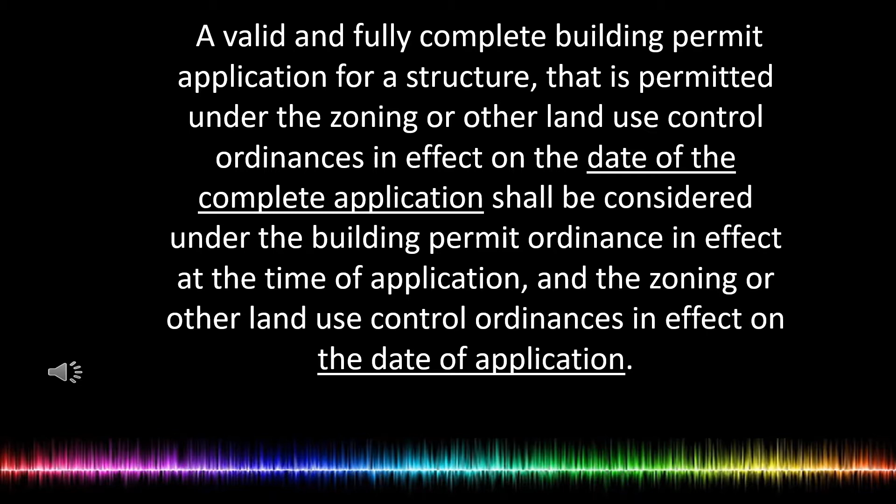It's the date of submission that sets what codes you're on. It's important to note that the application needs to be complete. Part of what is complete is defined by state law, and each city can amend that to make more requirements. In other words, you can't turn in something on a paper napkin and expect it to be vested under the 2015 codes.

There is no statutory requirement for the State Building Code Council to adopt each edition of the codes. They do so by choice to keep abreast of the latest building technologies. The State Building Code Council also amends the existing codes.

As an example, the 2015 IRC was retroactively amended to allow for cross-laminated timber because it was considered the best, most modern technology, and we should avail that to the designers and the builders.

The reason for the concrete stairways is one of the disadvantages of cross-laminated timbers: it's too stiff. So in a major earthquake, people on the upper floors would be beat to death. So they left the building fairly ductile, and lateral support is provided by the concrete stairways because, believe it or not, the concrete is capable of moving a lot more than the CLT is.

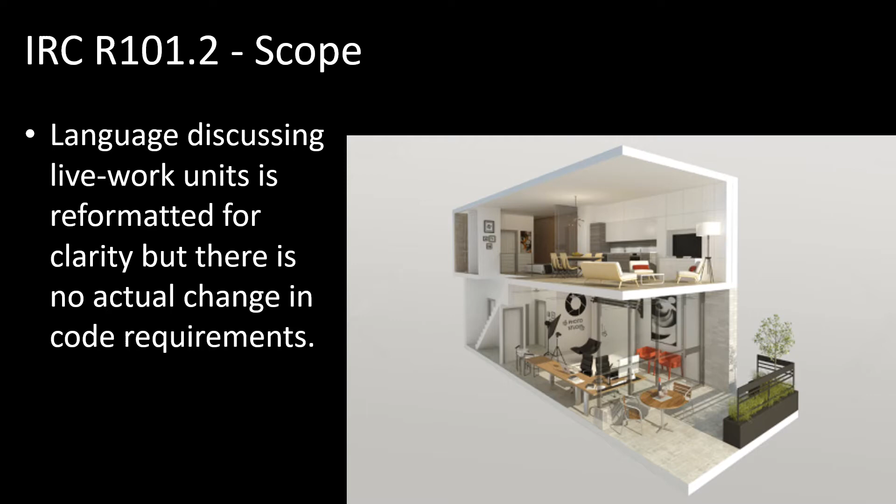The allowances on this slide come from an original interpretation requested by the city of Spokane. In the SBCC deliberations on the matter, it was brought out that short-term rentals were actually hotels and motels and governed under the building code rather than the IRC, unless they were owner-occupied. Hotels and motels require fire sprinklers, therefore Airbnb and similar vacation rentals require fire sprinklers.

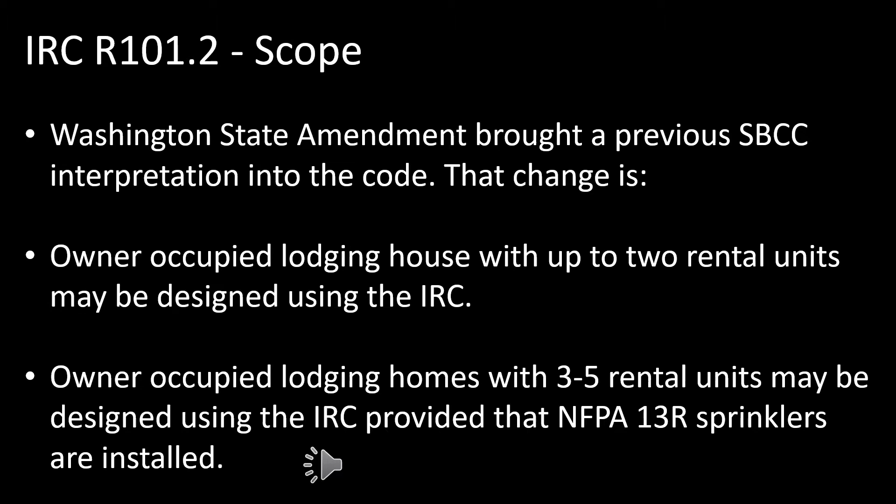Several jurisdictions are going after Airbnb and similar businesses for not providing fire sprinklers in their short-term rentals. The reason is that short-term rentals take those dwellings off of the long-term rental market, therefore driving up the cost of rental housing. This slide is fairly self-explanatory, although may be interpreted differently by various jurisdictions.

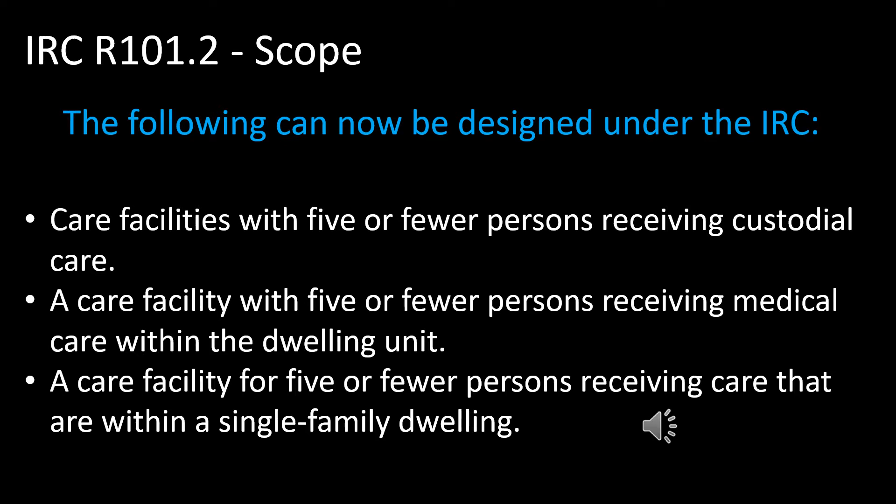The SBCC discussions on the issue, it was agreed that such buildings should fall under the scope of projects that building designers could design. Care facilities, as shown in the previous slide, must be provided with NFPA 13D, that's single-family sprinklers.

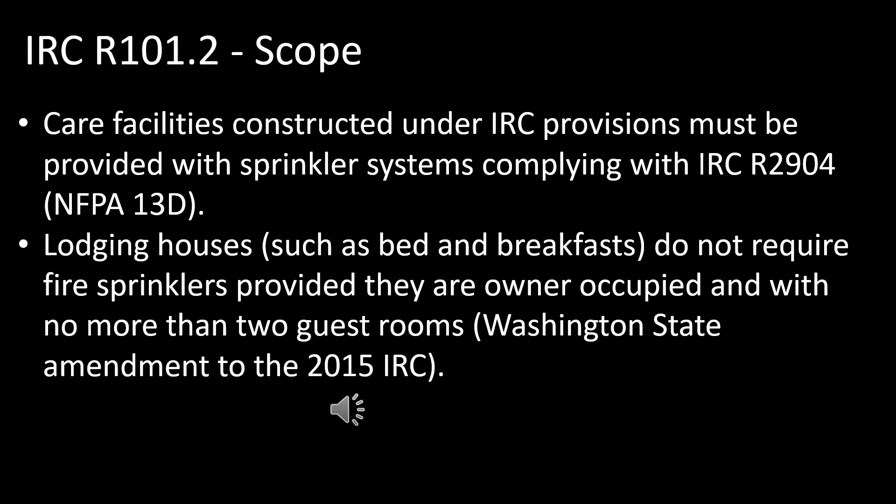Lodging houses, as long as they're owner-occupied and meet the limitations of previous slides, do not have to be fire sprinklered. This table provides an easy cross-reference between the 2015 and 2018 IBC code sections regarding occupancies previously listed. Please keep in mind the Washington State amendments discussed on previous slides.

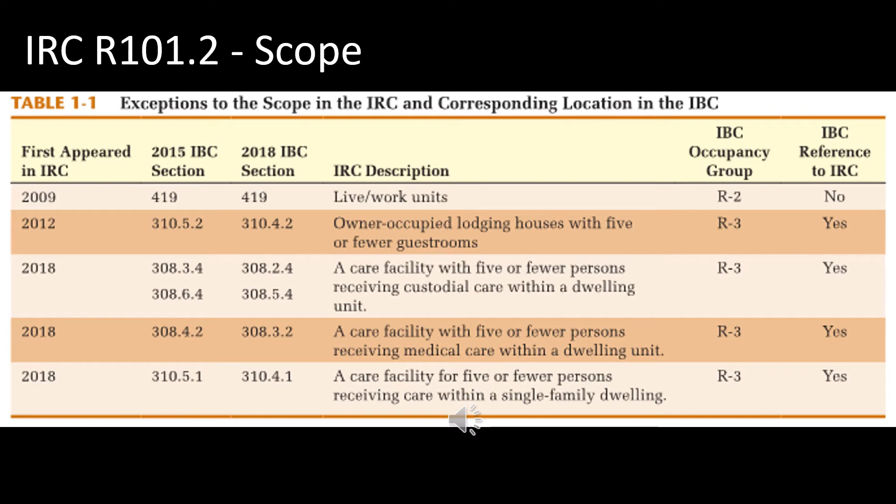Alternate materials or methods of construction have always been allowed by the codes. While the building official is not required to approve alternates, they must provide a reason for denial when requested.

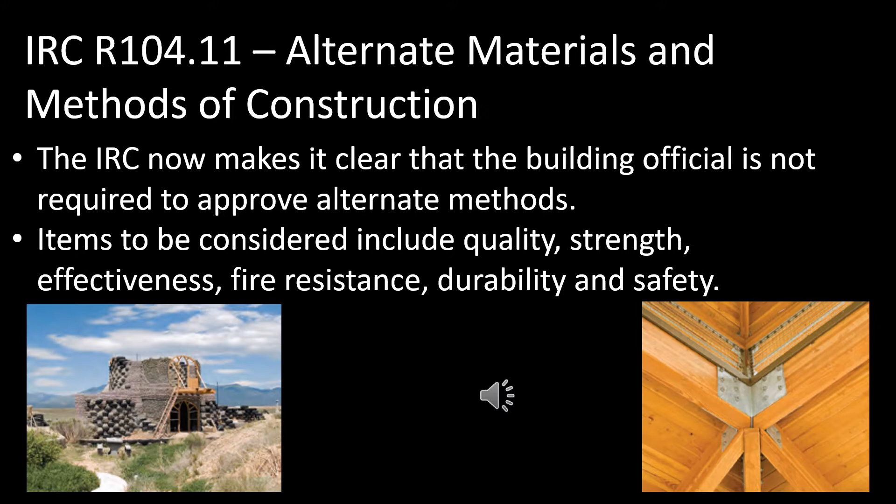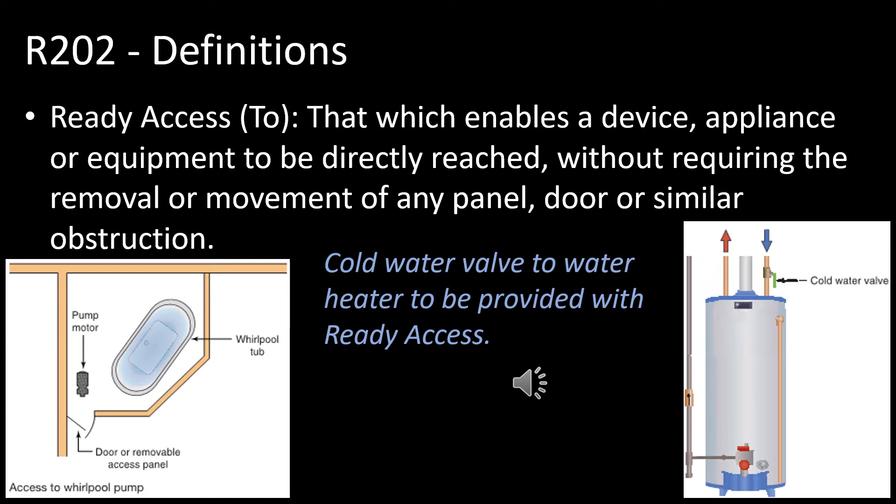Washington State has amended the IRC to include the definition of balanced whole house ventilation. Typically, the details for balanced whole house ventilation would be provided by the mechanical contractor. However, with more and more jurisdictions issuing combination permits, it may be required that documentation for such systems be provided at the same time as the building permit documents.

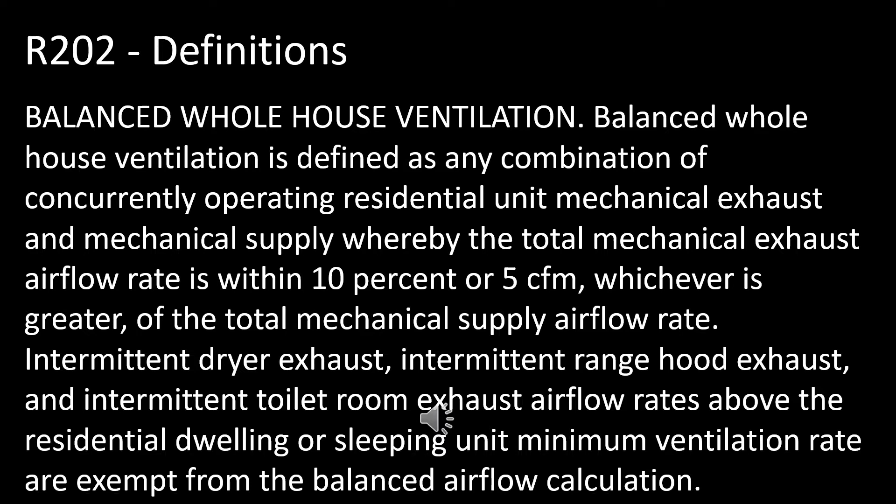Detailed requirements for those systems can be found in State Amendment M1505.4.1.4. Typically, combustion air for items such as fireplaces would need to be calculated in the balanced whole house ventilation system, but intermittent items such as bathroom exhaust, laundry exhaust, and kitchen exhaust would not be included.

There has been a lot of confusion over the years as to how fire separation distance is calculated. Some jurisdictions use the face of the foundation wall, while others use the face of the exterior wall. Imagine using the foundation wall when you have a 2-foot cantilever extending closer to the property line. That just doesn't make sense.

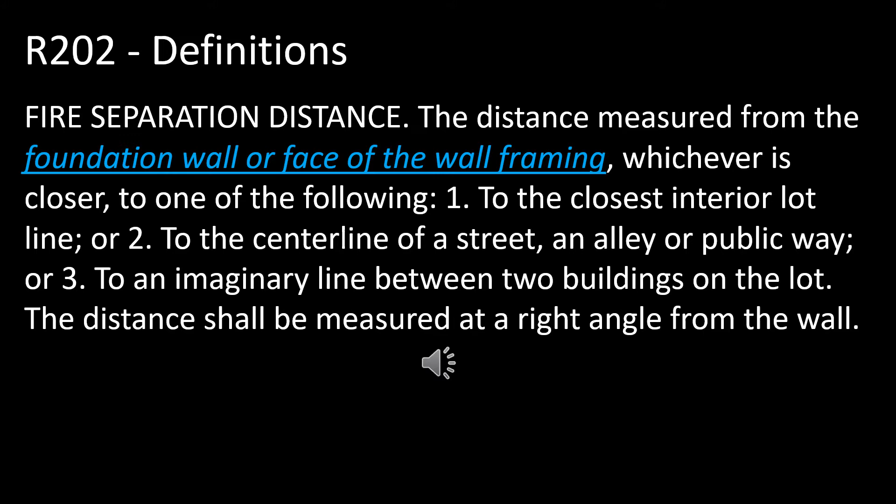The new definition clarifies this to include either, based on which one is closest to the property line or an assumed property line between two buildings.

Another new definition in the IRC is sleeping lofts. Such spaces were previously not recognized in the IRC. We'll talk about the detailed requirements for sleeping lofts a little bit later.

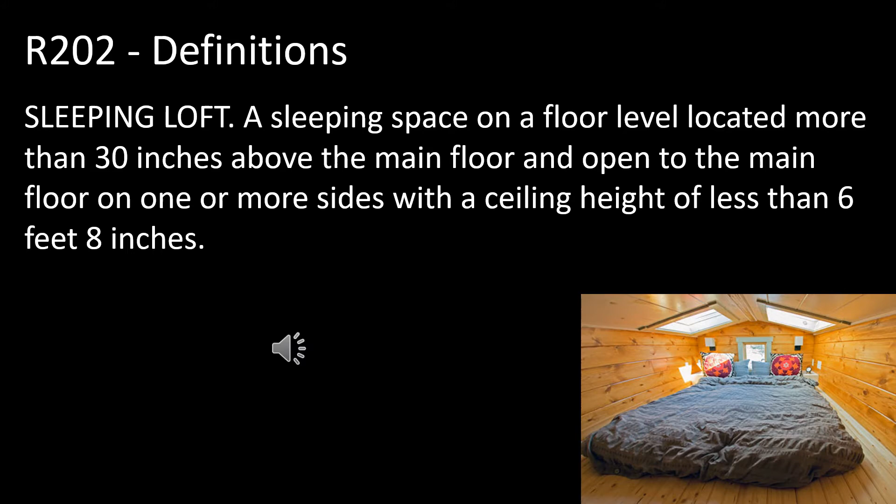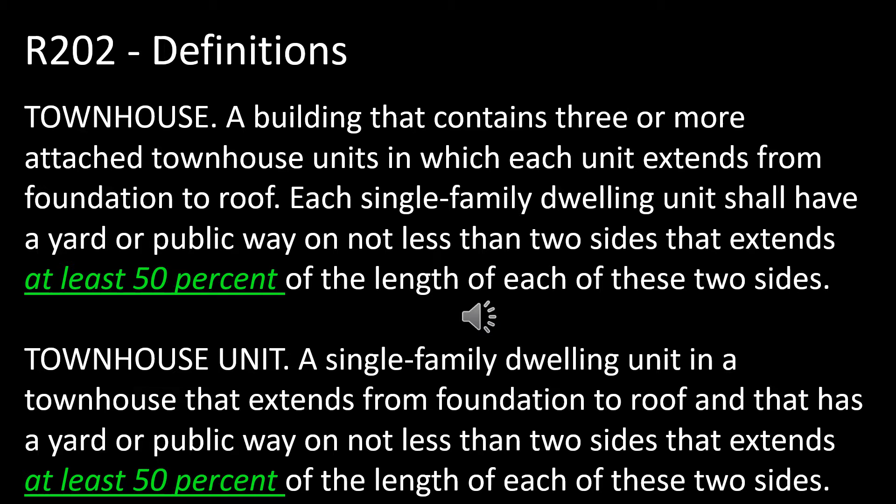Previously, a townhouse unit had to be completely open to yards or courts on 2 or more sides. This has now changed so that the 2 or more sides only need to be open for 50% of their length to open courts or yards.

Projections such as eaves, decks, or balconies, which were within required fire separation distance, had to be fire resistance rated in accordance with ASTM E119 or UL 263, which are tested and listed assemblies. The code now allows non-rated assemblies as found in IBC section 721, or calculated fire resistance as shown in IBC 722.

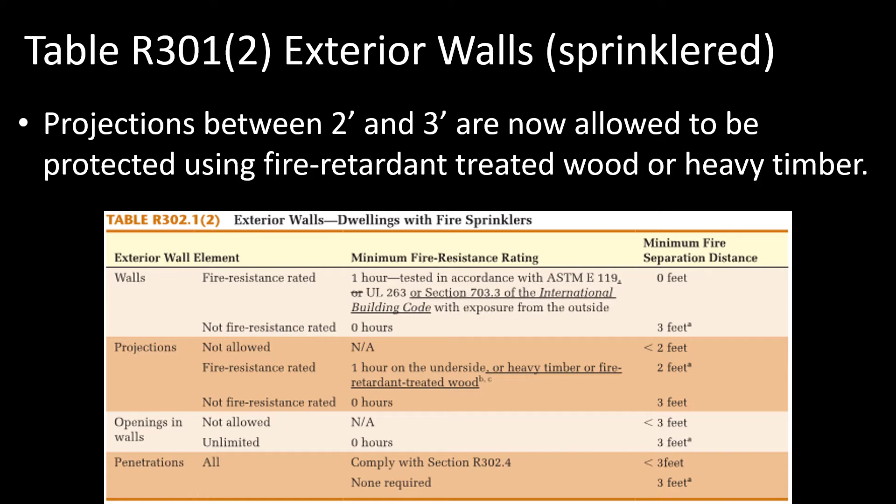The 2015 IRC did not allow 2 one-hour walls to separate townhouse units unless the building was provided with fire sprinklers. Washington State had amended the requirements so that fire sprinklers were not required when using 2 one-hour walls between townhouse units. Because several other states did not require fire sprinklers in townhouses, the Washington Association of Building Officials, WABO, proposed and was successful at removing the fire sprinkler requirement in the national code.

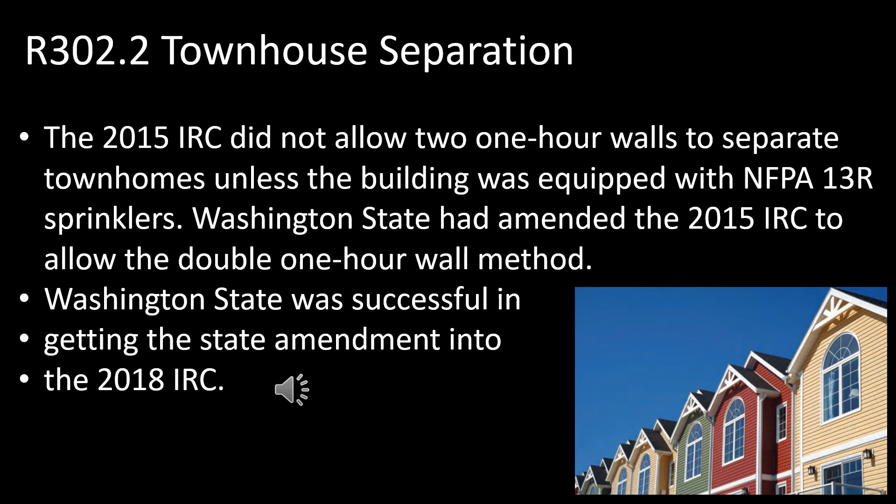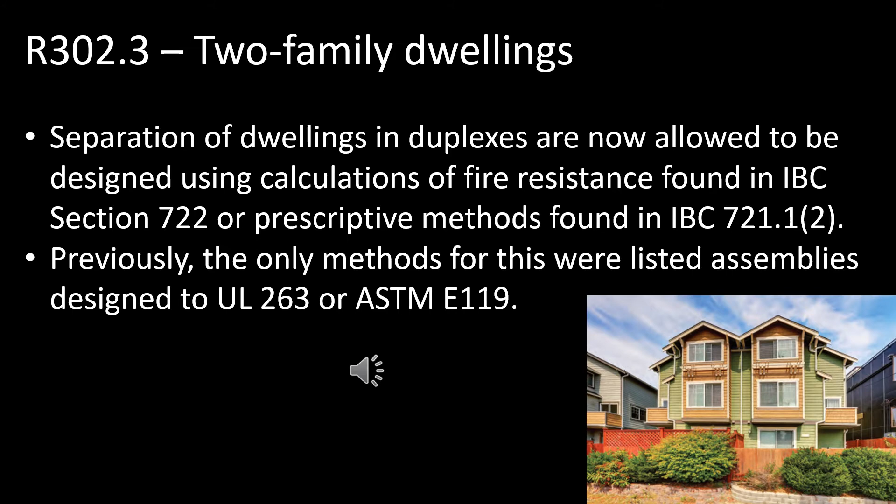In duplexes, the IRC now allows calculated or generic fire resistance for the 1 hour wall separating those units. Those, again, are found in IBC sections 721 and 722. IBC section 703.3 guides us back to IBC section 721 and 722 for either calculated or generic fire resistance.

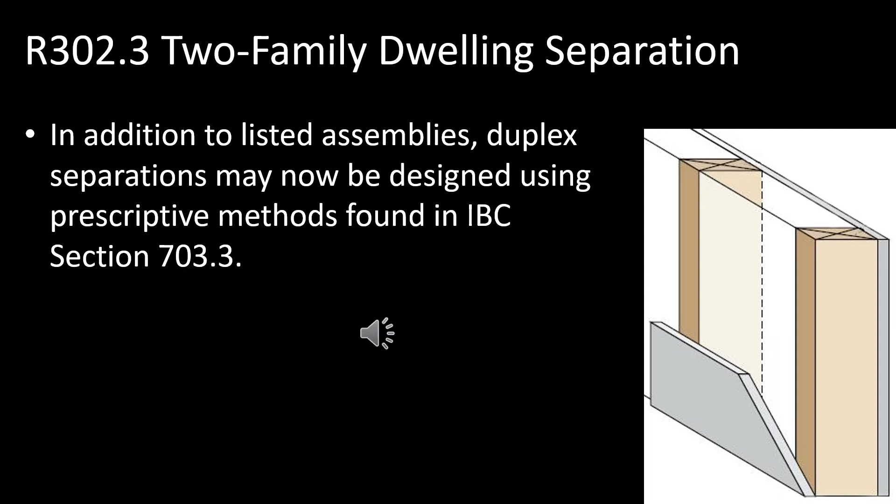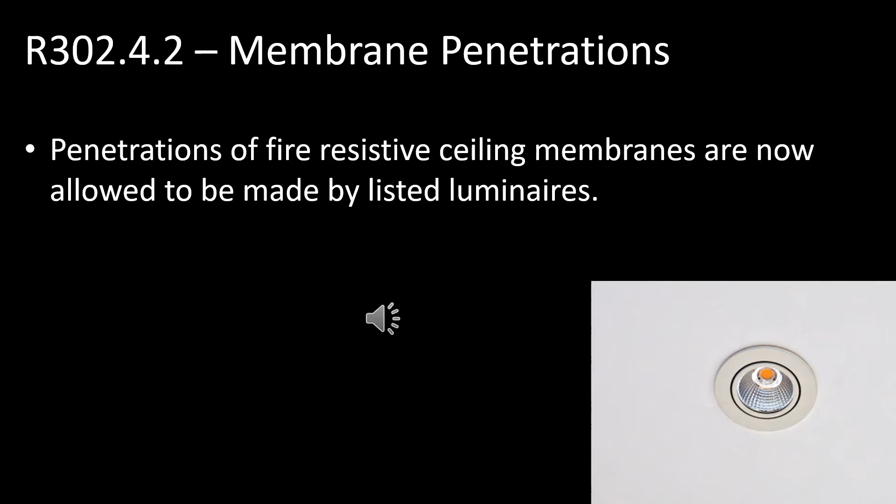I recommend that when you specify can lights in 1 hour rated ceilings, you call out the requirement for 1 hour listed fixtures. Of course, this doesn't apply to townhomes, as a townhome has to be 1 unit from the ground to the sky, so there's nothing above it.

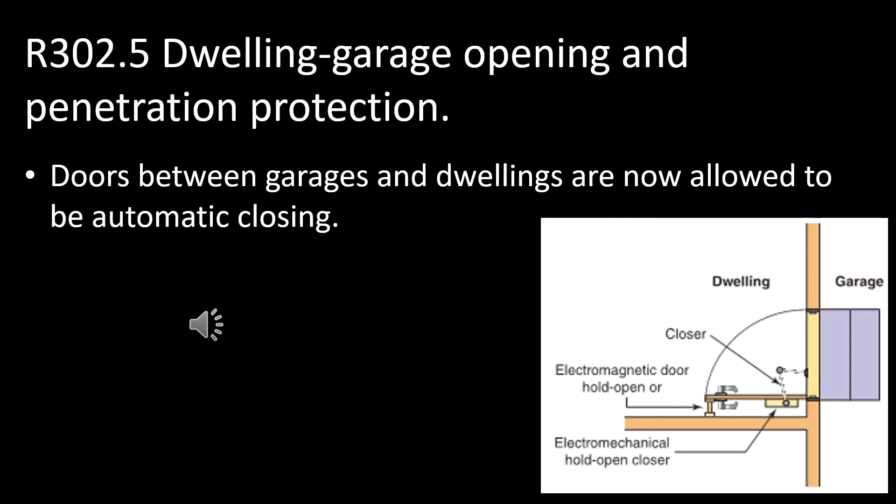This change in language is simply clarification of what the code had always intended, and probably will rarely, if ever, affect the design of your buildings.

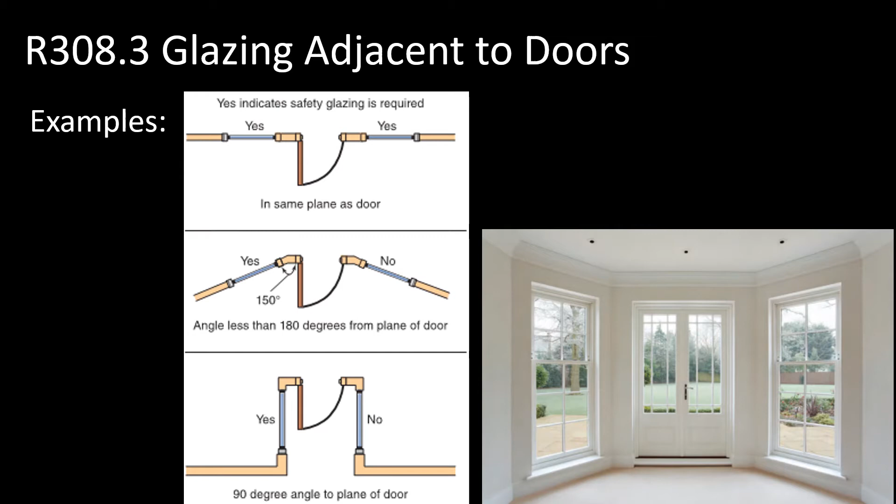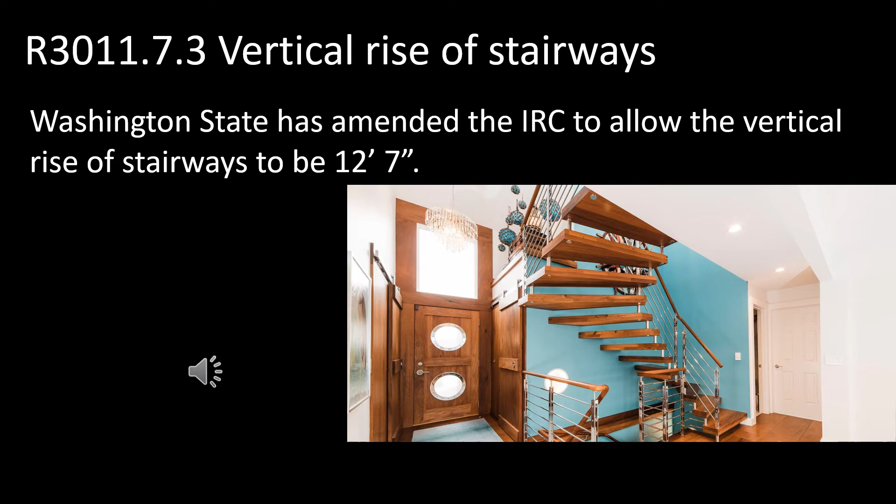The change in vertical rise in the IRC is intended to give more flexibility in your design to meet real-world conditions. This change is fairly straightforward. They've simply added electrical appliances to the items that would invoke protection of the floor or ceiling above in crawl spaces or unfinished basements. Of course, no protection is required in a sprinklered building.

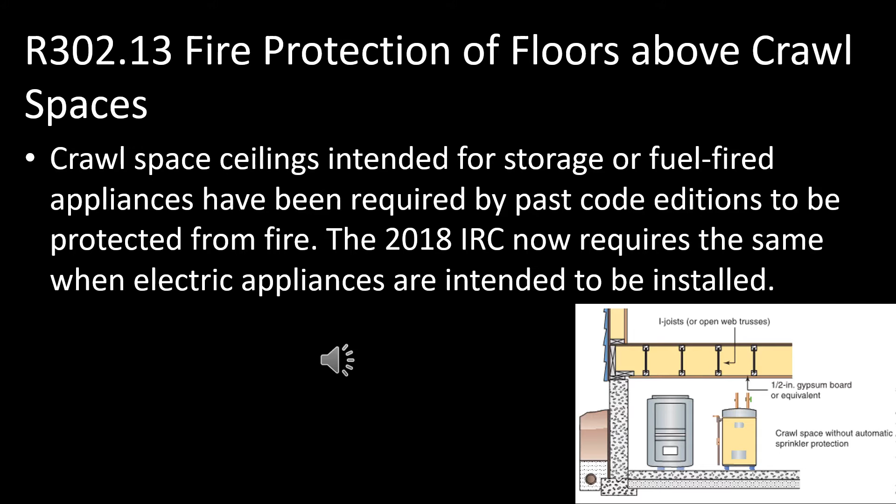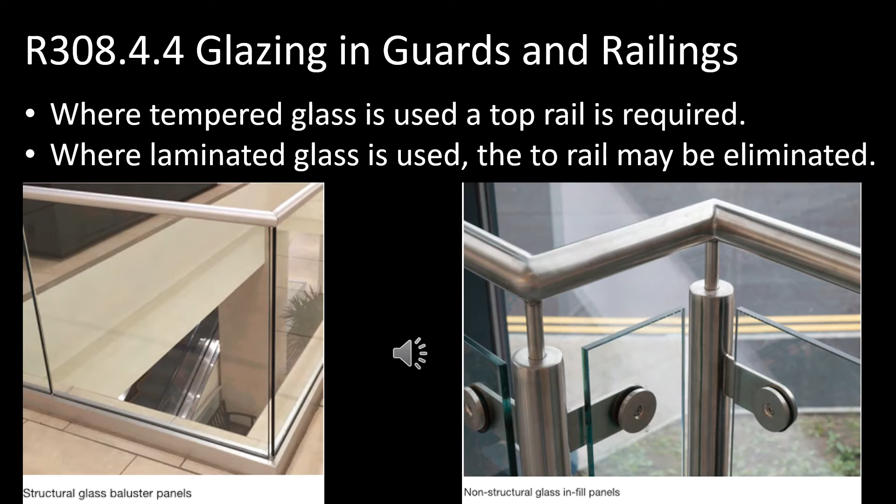Because tempered glass breaks into small pieces and falls when broken, it provides no actual protection from fall. Laminated glass, however, does provide protection because it'll generally stay in place. Therefore, when tempered glass is used, a top rail is required on a guard. When laminated glass is used, a top rail is not required.

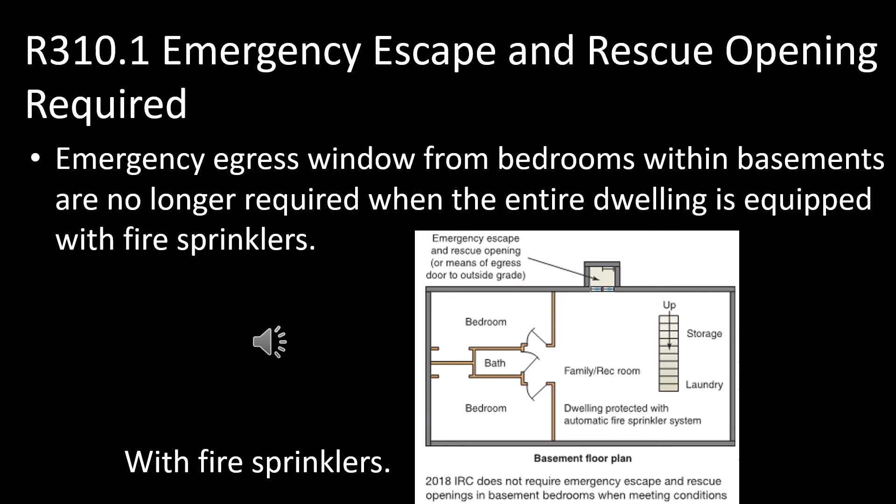The IRC now recognizes that egress windows from basement bedrooms are no longer required when the entire dwelling is equipped with fire sprinklers. Remember, that's the entire dwelling. Although you still need two ways out of the basement in this scenario, one of which has to lead directly to the exterior of the building.

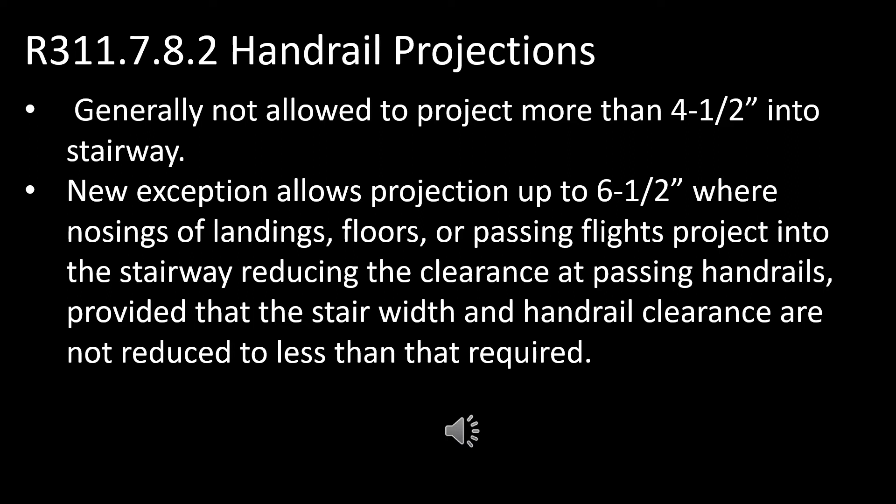A new exception to the handrail projection limitations provides for adequate clearance behind the handrail when it passes a projection of a floor, landing, or tread return. That projection can be up to 6.5 inches.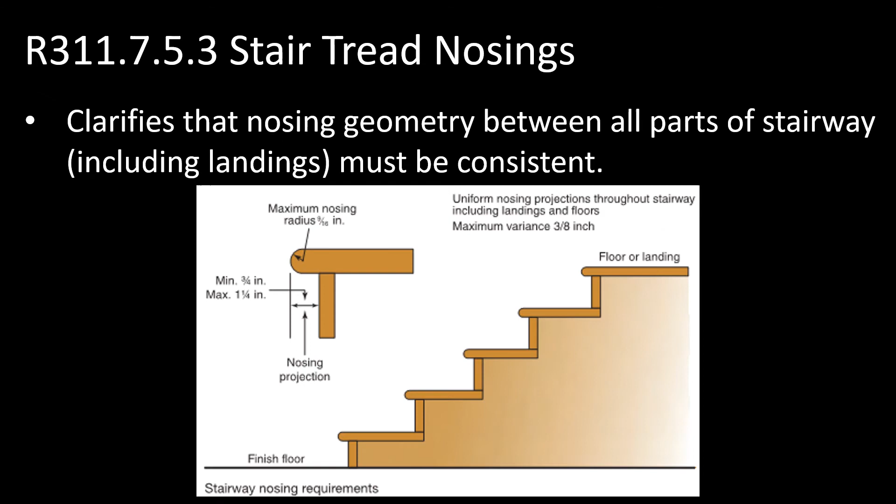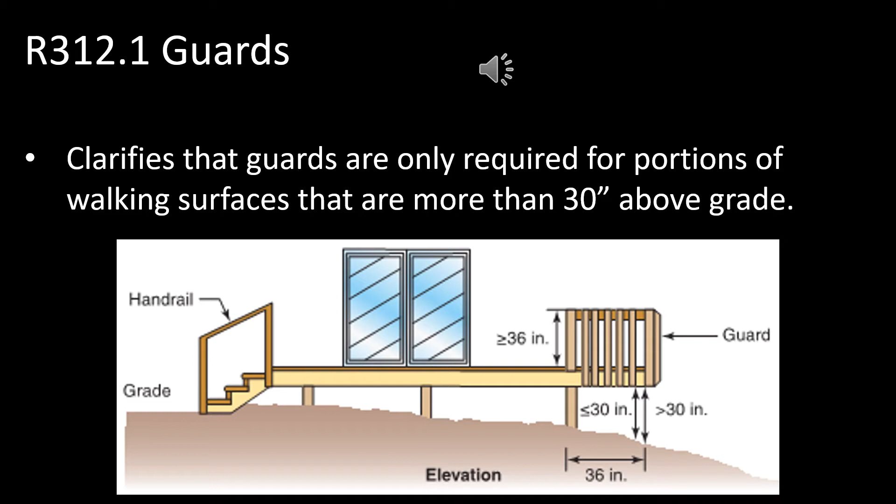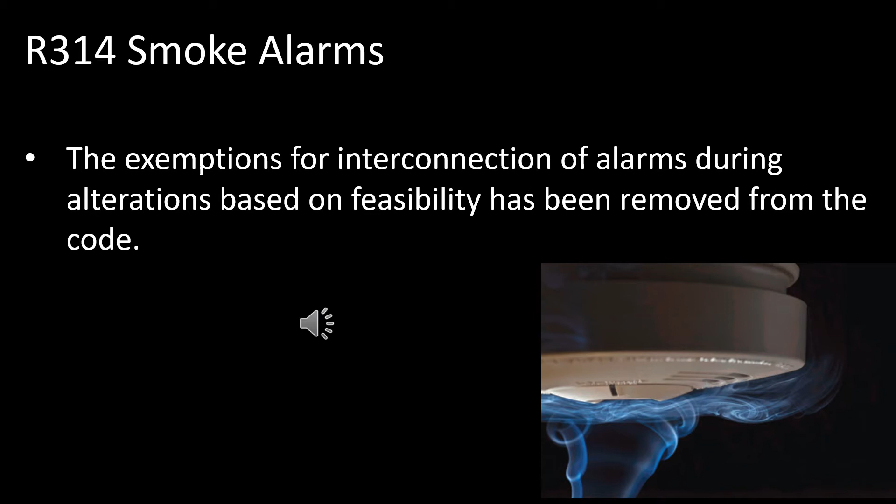The IRC has removed the allowance not to interconnect smoke alarms in existing buildings due to infeasibility. During the ICC code hearings on the issue, it was determined that with radio-based smoke alarms, the exception was not necessary. Washington State has amended this section to not require interconnection of new smoke alarms in existing buildings where existing smoke alarms are not interconnected or where new smoke alarms are not capable of being interconnected with existing smoke alarms.

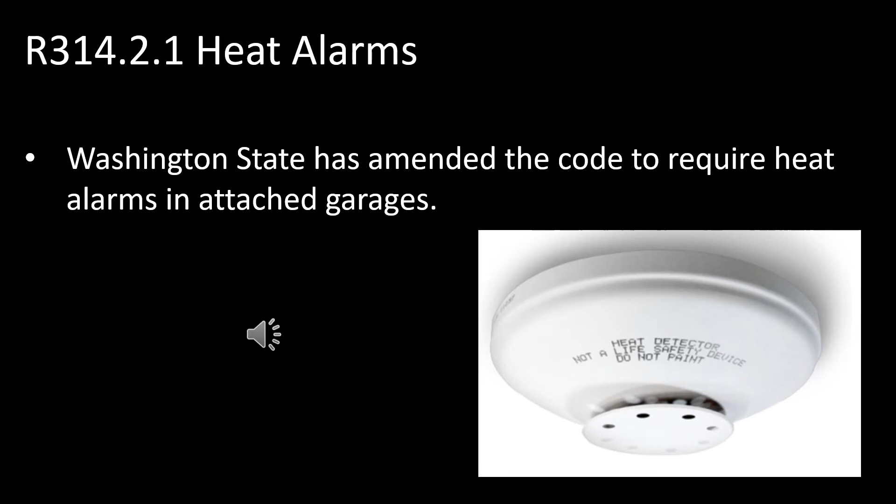There are two basic types of heat detectors. There are rate-of-rise detectors, which tell how fast the temperature is rising and will set off an alarm. Or there are the ionization type, which works a lot more like a smoke alarm. Either one is acceptable, but they do need to be installed in all attached garages now.

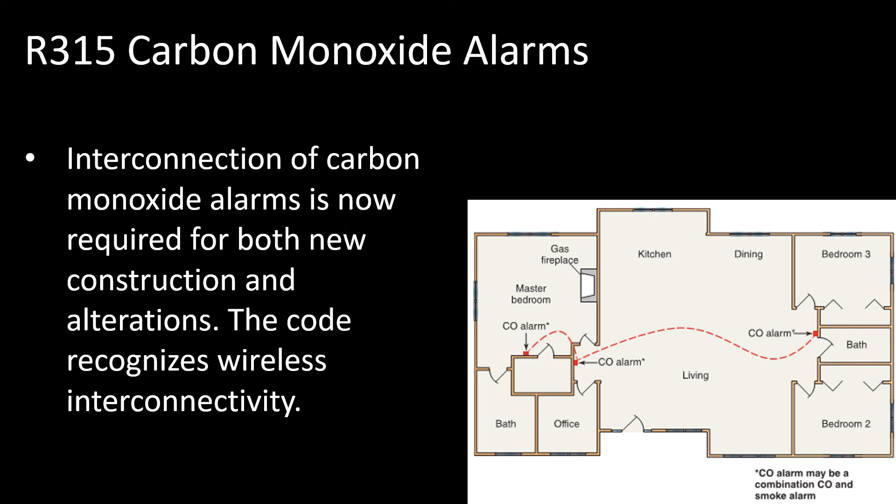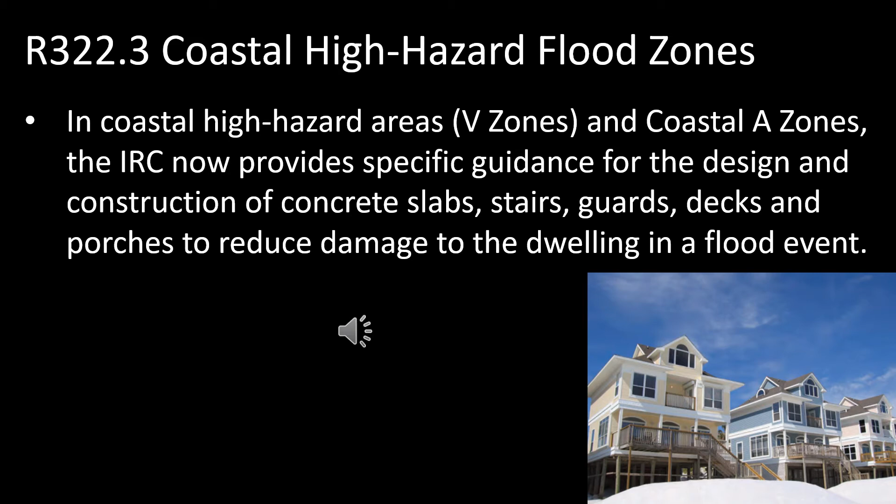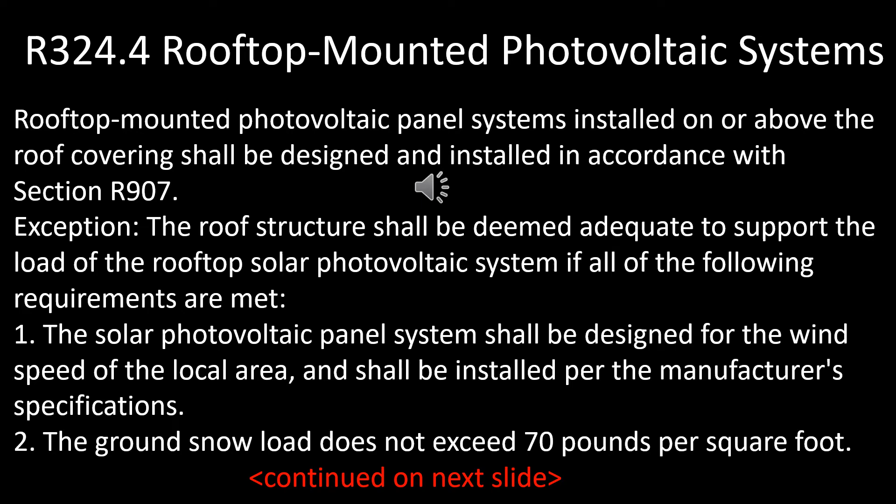The intent was to reduce the cost of PV systems by eliminating the need for engineering. Several jurisdictions also do not include the value of the PV systems in their building permit valuations, thereby reducing permit fees when PV systems are installed. Please keep in mind these exceptions only apply to IRC buildings due to the structural redundancies inherent in the design of such buildings.

The International Fire Code, IFC, has pathway requirements for roofs with PV systems. The clear pathway requirements in the IFC are to allow rooftop firefighting ventilation techniques. These are typically 36 inches inward from the exterior walls, but may vary with each jurisdiction.

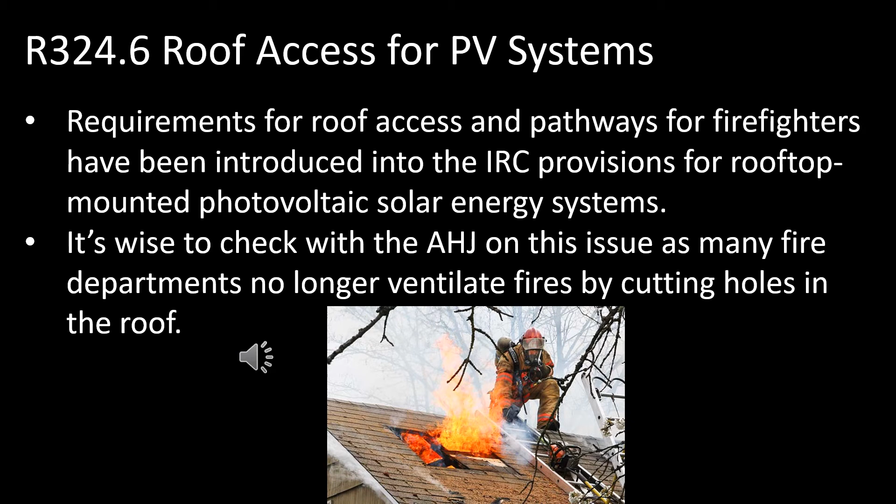Bellingham, as an example, did not adopt the pathway requirements because they do not use rooftop firefighting techniques, but rather create front and rear openings in the exterior walls and then use fans to ventilate the structure.

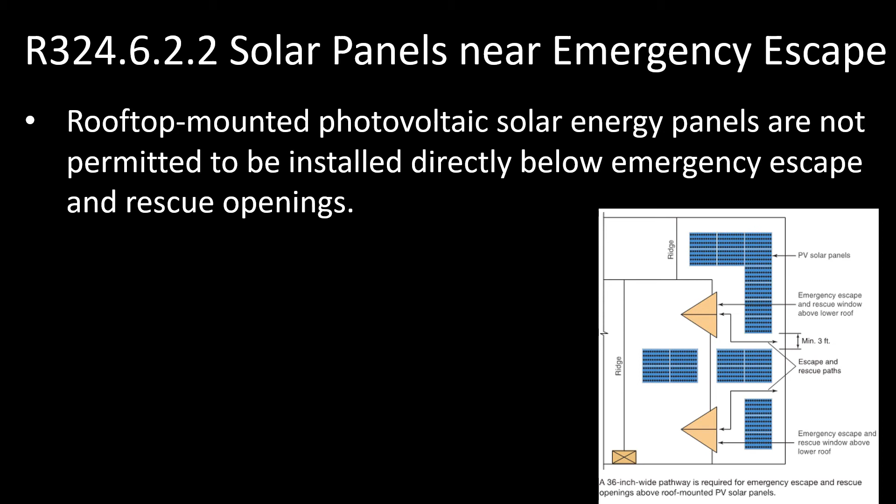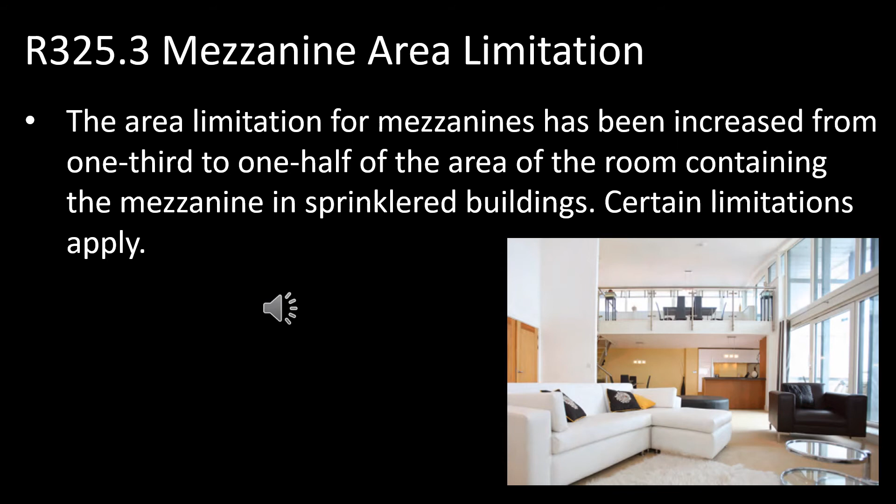This is not a change in Washington State, as the State Building Code Council created the 50% rule for sprinkler buildings in the 2015 IRC. The WABO Technical Code Committee proposed a nationwide change in the IRC, and it was adopted into the 2018 IRC.

This is another conflict between a state amendment and the IRC. The state amendment is found in IRC Section 325.6, while the generic IRC language for habitable attics is found in IRC Section 326.

The state amendment adds to the generic IRC requirements. The habitable attic in the state amendment must be in a sprinklered building, and the habitable attic must be no larger than 50% of the floor area of the room below.

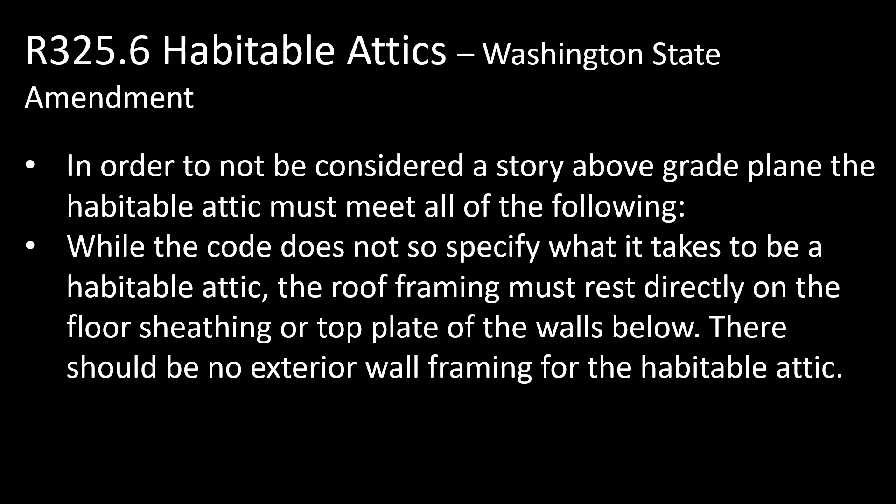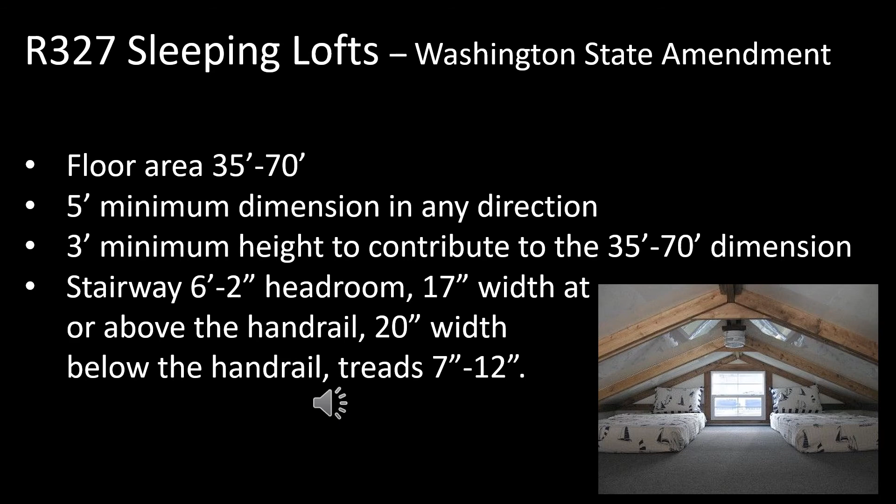This Washington State amendment is misnumbered as IRC Section 327, and provides requirements for stationary storage battery systems. It was not the intent of the State Building Code Council to replace stationary storage battery system requirements with sleeping loft requirements. A more appropriate code section for the sleeping lofts would have been IRC Section 328, which currently does not exist in the IRC. I'm sure it'll get caught over the next year or two, and that'll probably be changed through another code amendment.

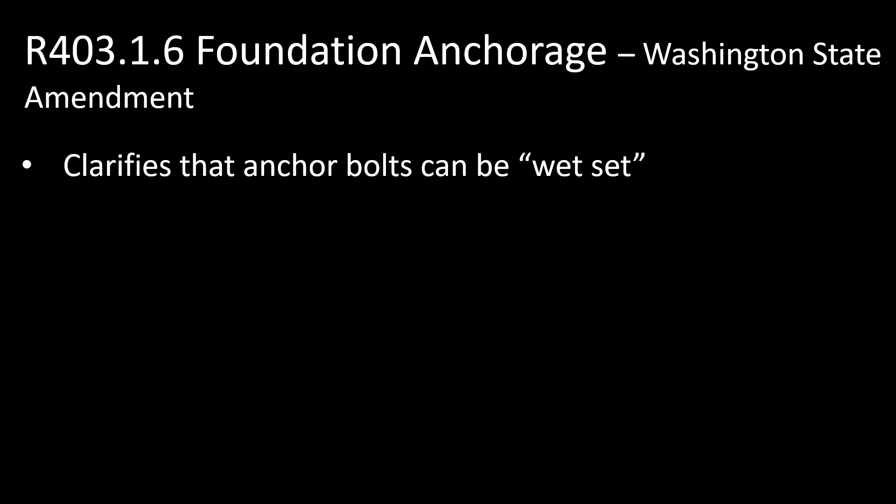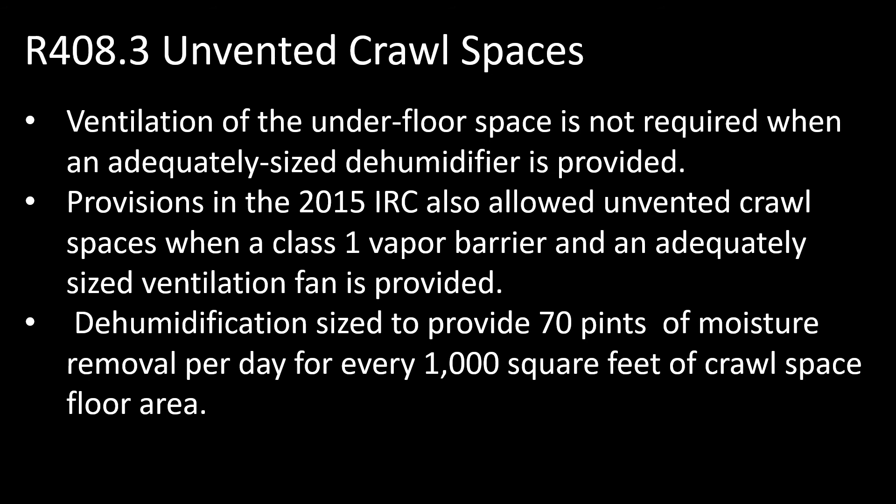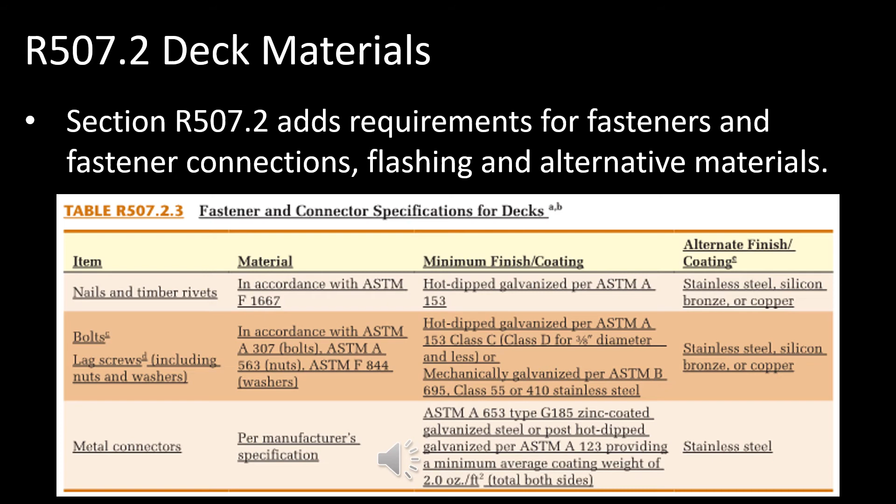With the advent of Simpson Strong-Tie Z-Max connectors, hot-dipped galvanized fasteners are generally required. Such connectors will meet the requirements of IRC R507.2. However, if you wish to specify something different, IRC Table R507.2.3 provides applicable standards for all deck connectors, regardless of type.

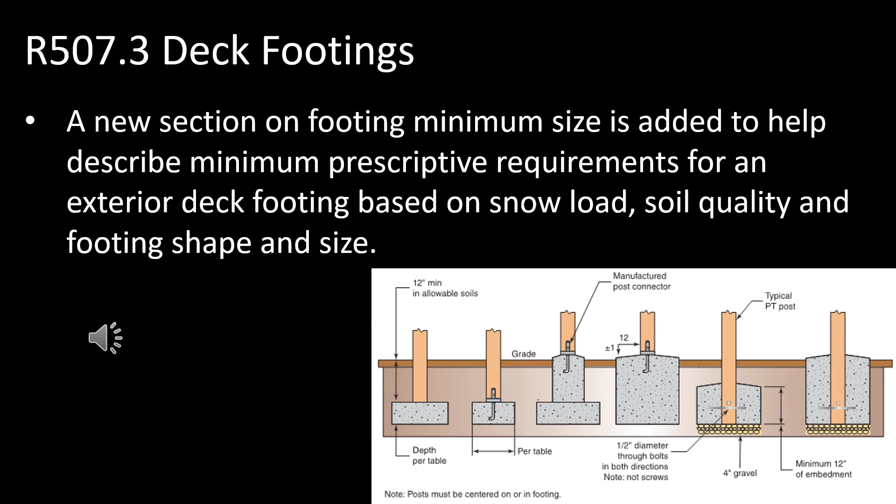A new table has been added to the 2018 IRC detailing deck footing requirements. This section in the 2015 IRC regulated composite plastic deck materials. Those requirements have been moved to IRC Section 507.2.2.

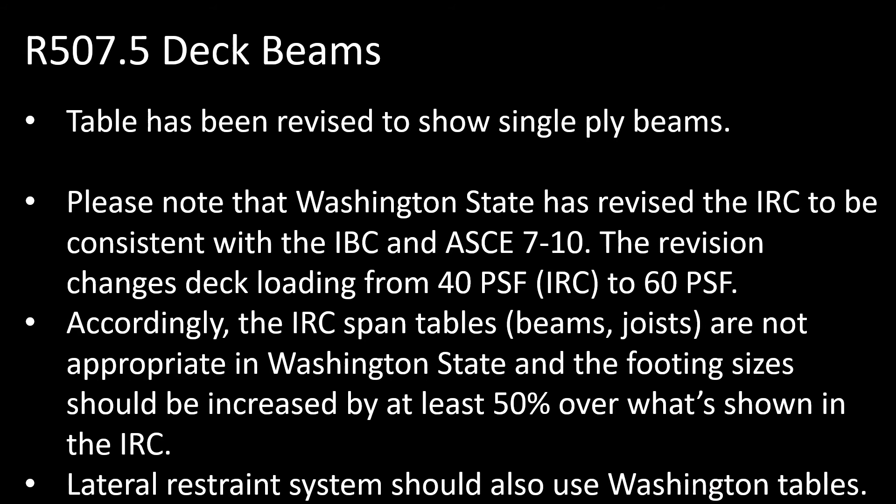Live loads for decks and balconies have been a conflict between codes for the last several years. The IRC until recently required a 40 pound per square foot live load for decks, and a 30 PSF live load for decks serving bedrooms only. The IBC and ASCE 7 required the deck live load for residential to be 1.5 times the live load of the occupancy served, which worked out to 60 pounds for residential decks and 45 pounds for decks serving only bedrooms.

The City of Seattle proposed a code change to align the various codes. That change was simply to require 60 PSF live load for all residential decks. The proposal passed at the ICC committee action hearings held in Richmond, Virginia, and again passed at the full membership hearings in Columbus, Ohio.

ICC created an online voting platform not long ago called CDP, meaning Code Development Process, CDP Access, where members who could not attend out-of-state meetings could still vote on proposed code changes. The CDP Access voting takes place after the in-person vote at the membership hearings.

After the 60 PSF change was approved at the code hearings, Seattle proposed the change retroactively for the 2015 IRC. The State Building Code Council agreed, so in Washington we have a 60 PSF live load for residential decks. During the CDP Access voting, the proposed change failed on a national level. However, Washington decided to keep the change in our codes.

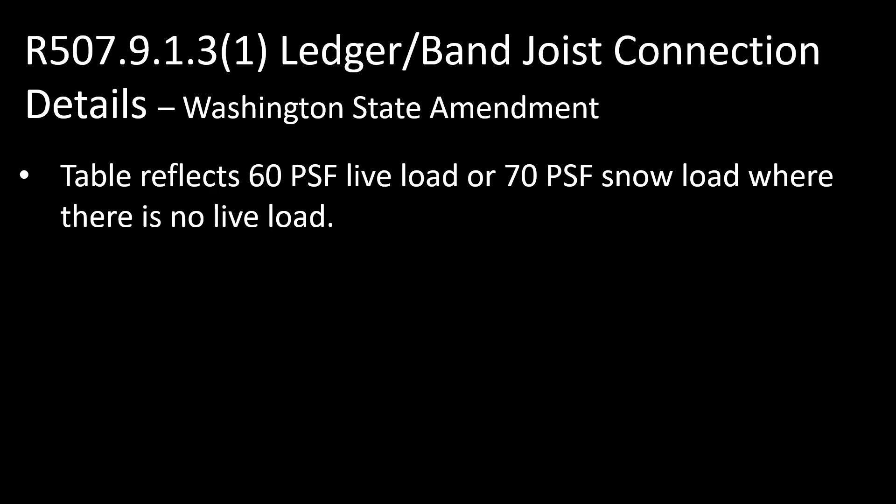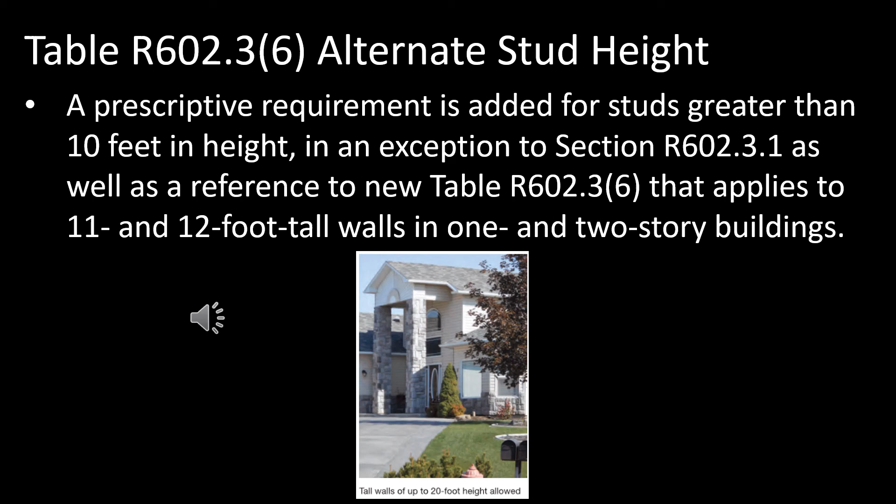Earlier versions of the IRC limited wood stud heights to 10 feet between lateral supports. A new table was added to the 2018 IRC allowing up to 12-foot stud heights between lateral supports, provided the limitations of the table are met.

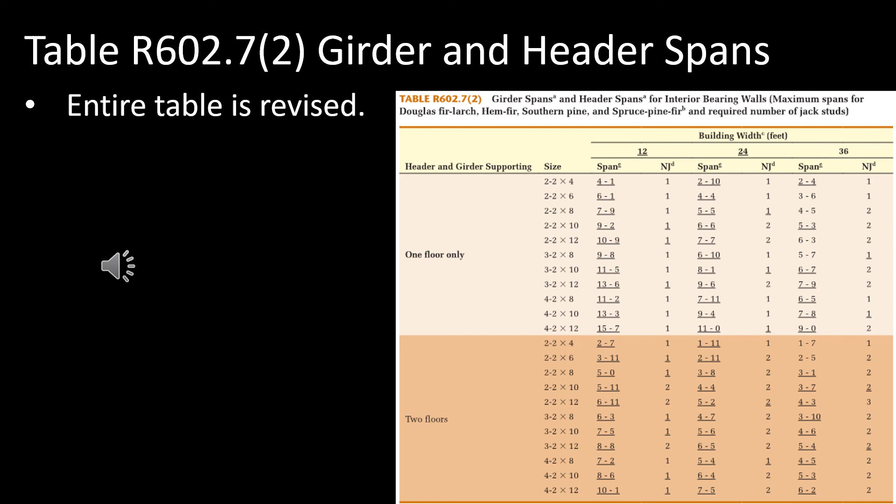IRC Table R602.7, number 2, has been revised in its entirety. Girder and header spans are updated to assume number 2 southern pine rather than number 1 southern pine as used in the 2015 IRC. A footnote was added to clarify that headers and girders are assumed to be braced. For headers with pony walls above, a further reduction in span is taken for 2x8 or larger headers.

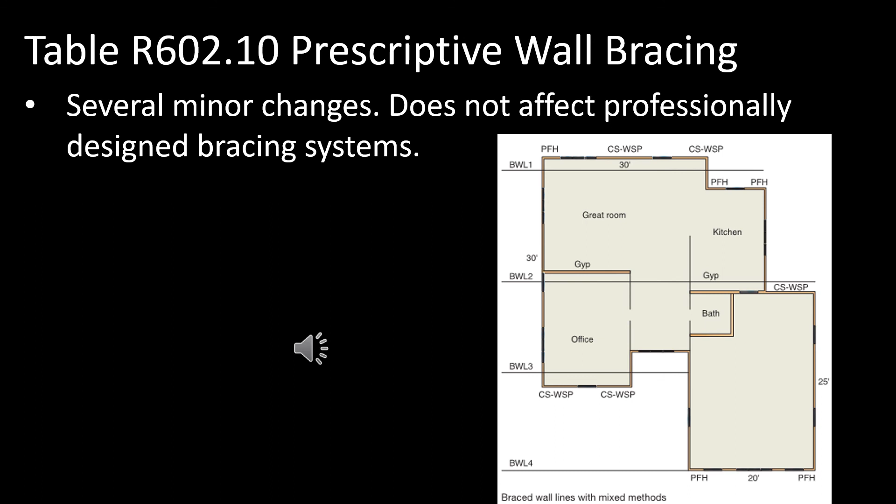IRC Table R602.10 has been monkeyed with every code cycle since the original 2000 IRC. We can all breathe a sigh of relief that the changes in the 2018 IRC are almost insignificant.

Over the years, there's been a lot of discussion about fasteners or ties being able to support masonry veneer when the fastener or tie has to penetrate 2 inches of foam insulation before encountering structural sheathing. The concern was the weight of the veneer bending or withdrawing the fastener or tie. Testing showed that properly installed veneer was not a problem for gravity loads, so the concern was limited mainly to overturning forces and lateral loading.

Testing determined that veneer installed per the new IRC Table R703.8.4, number 2, would not create issues for either gravity loads, lateral loads, or overturning forces.

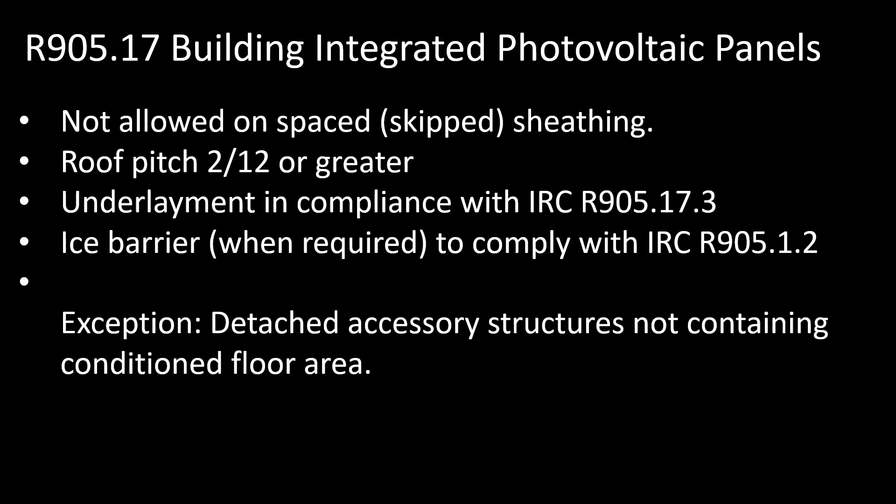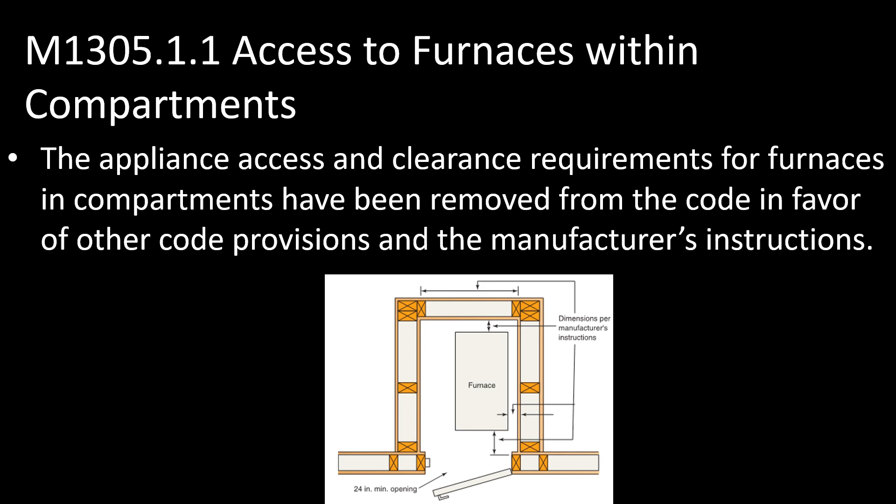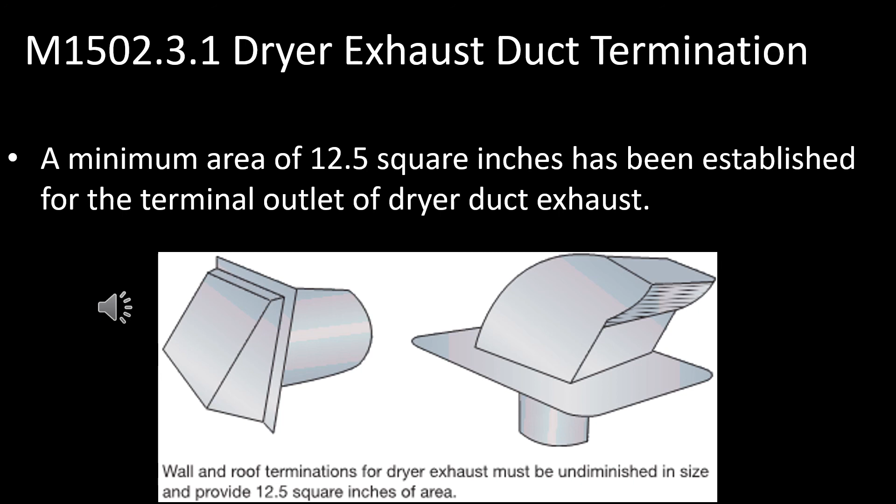This last item that might impact the design of your buildings is that dryer ducts cannot be deformed. A 4-inch dryer duct in a 2x4 wall cavity would require deformation in at least part of the duct. Accordingly, the duct, when installed in a wall cavity, must be installed in a 2x6 wall. Please keep in mind that the Washington State Energy Code does not allow any duct to displace required insulation, so dryer ducts must not be installed in exterior walls.